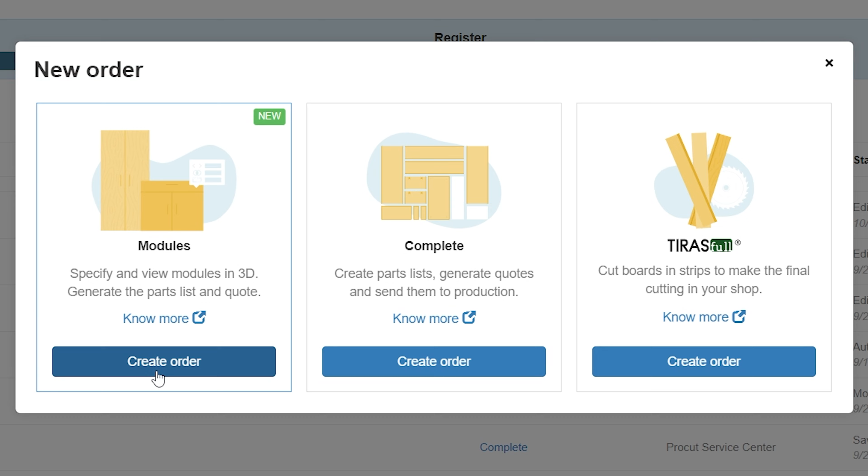First of all, I'm going to access Cortecloud.com, select my country US, and log in to my account. I'm going to create a new order and select modules and my service provider.

I'll name my client, in this case John, and begin by applying some changes to the base cabinets with 2 doors. So I'm going to search for a 2-door base cabinet and add it to the project. I'll specify my room, in this case kitchen, and round up the measurements to 35 inches, 27, and 21 depth.

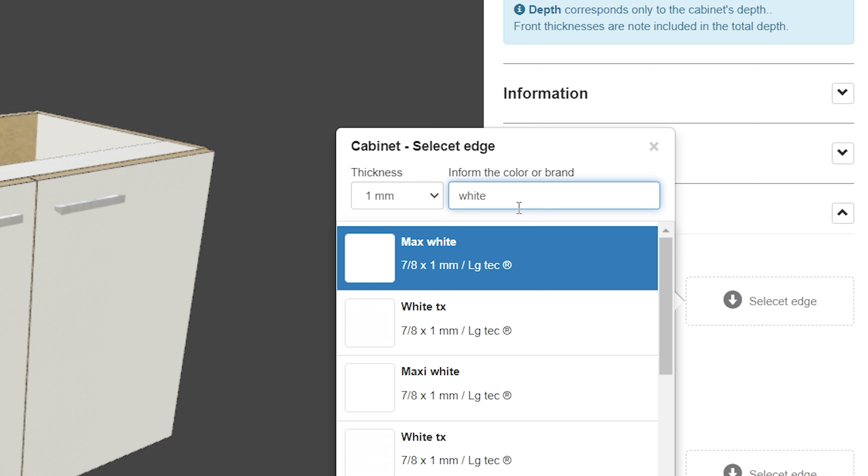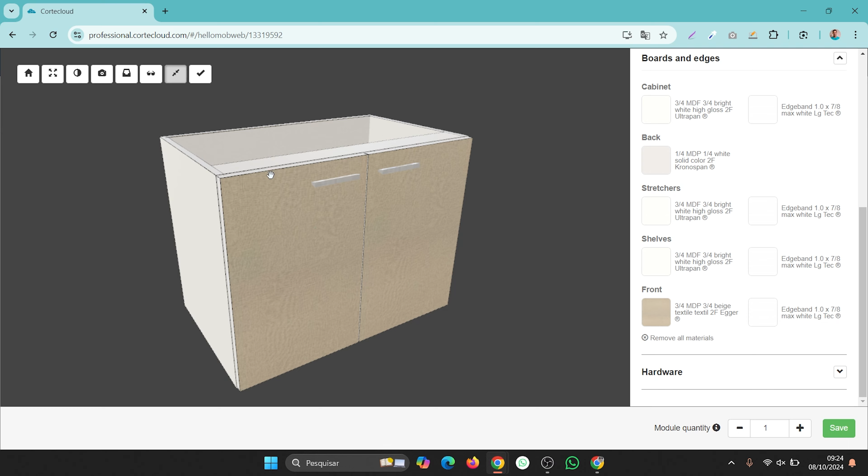Now I'm going to select my materials or boards to apply to the cabinet. I'll use 3/4 white and a 1mm edge band white as well. For the back, I'll apply 1/4 white back, and for the fronts I'll apply a different color, beige, just to make it easier to recognize the changes we applied to the cabinet. I'll leave the edge band white so the changes are easily viewed.

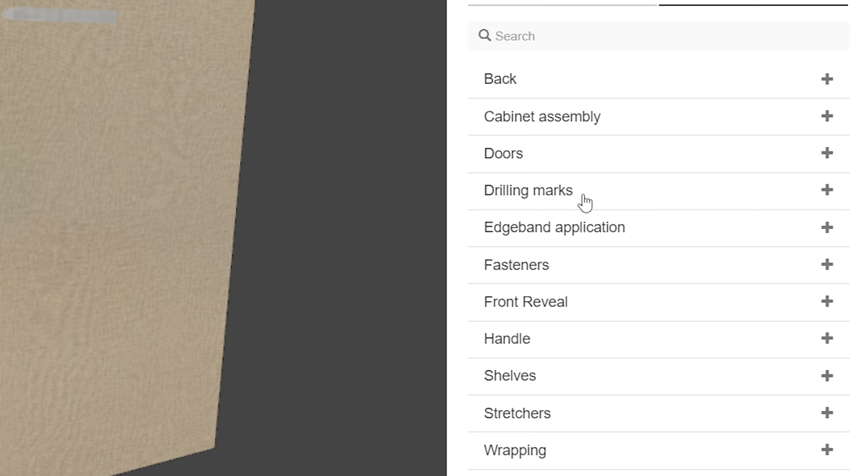Okay, so I'm going to Preferences, Advanced, and we're going to be discussing mostly the front reveal preferences. First, I'm going to apply some changes to the front reveal, and after understanding the simple changes, we're going to combine some changes with the stretchers and handle types.

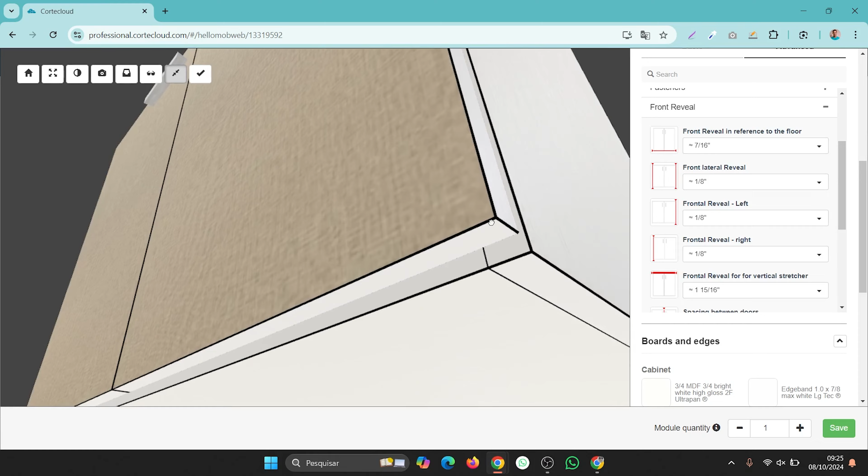First, I'm going to apply the front reveal in reference to the floor, which is this slack or reveal we have here under the doors. I'm going to change from 1/8 to say 7/16. As you can see, you have a different reveal applied to the bottom of the cabinet. I'm going back to 1/8.

Now I'm going down here to the top frontal reveal, which is the same as the bottom reveal, but applied to the top. In this case, 1/2 inch.

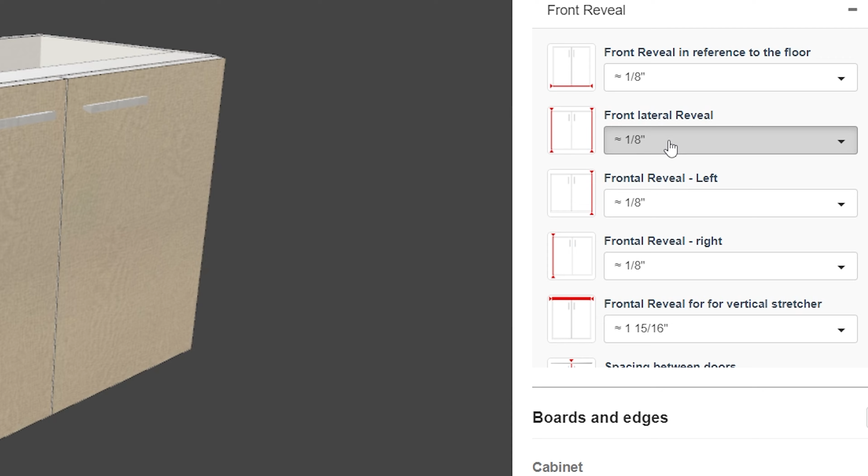Now we're going to apply lateral reveal to the doors, or change the lateral reveal, which is 1/8, and I'm going to apply 5/16. As you can see, at the right and left side, the reveal has changed by modifying this preference. But I can separately change the reveal from the sides if I modify this parameter, tweak for lateral reveal.

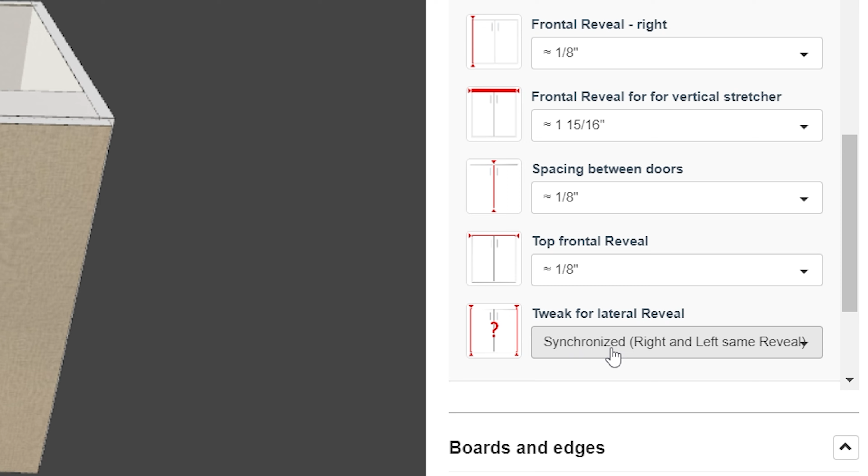I'm using the synchronize mode. If I change to independent, I can separately change the left and right reveals. So for front reveal right, I'm going to apply 5/16, and as you can see, I've just changed the right side of the cabinet, while the left side hasn't changed because I didn't change the front reveal left.

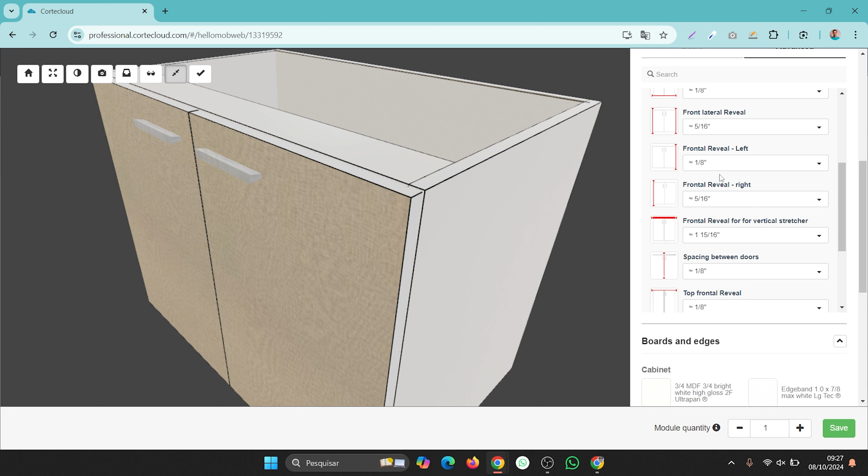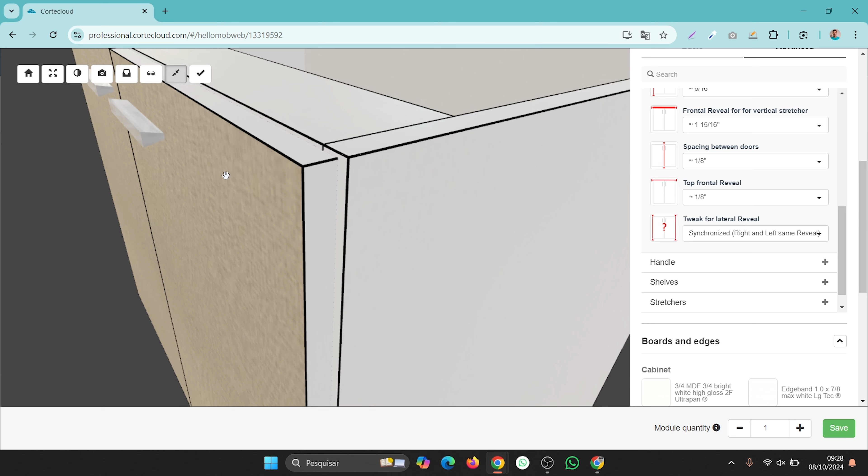If I want to apply a different reveal to the left, I'll apply 1/4 inch, and as you can see, I have 1/4 reveal on the left and 5/16 on the right side. If I go back to the tweak and use the synchronize mode, you can see that both reveals came back to the same measurement as defined on the lateral reveal. I'll go back to 1/8 again and leave the same reveal at both sides.

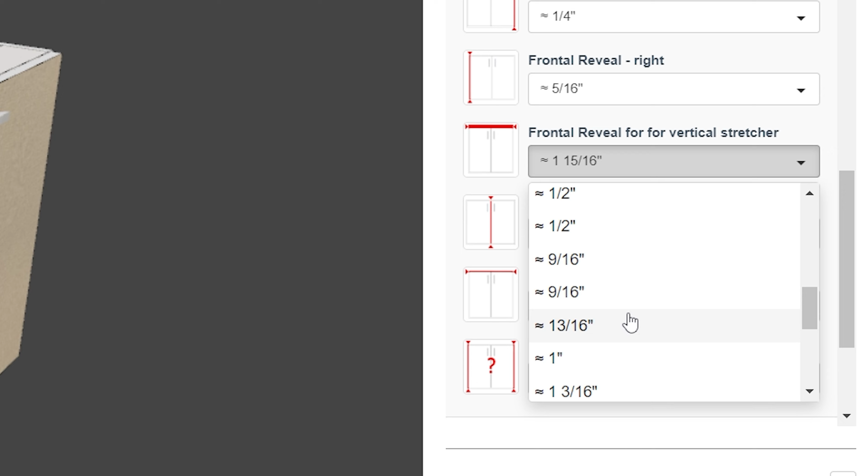Moving on, you can see that we have the frontal reveal for vertical stretcher. Why is this reveal higher than the reveals we've used, and not applied to the frontal stretcher? Because the stretcher is in a horizontal position.

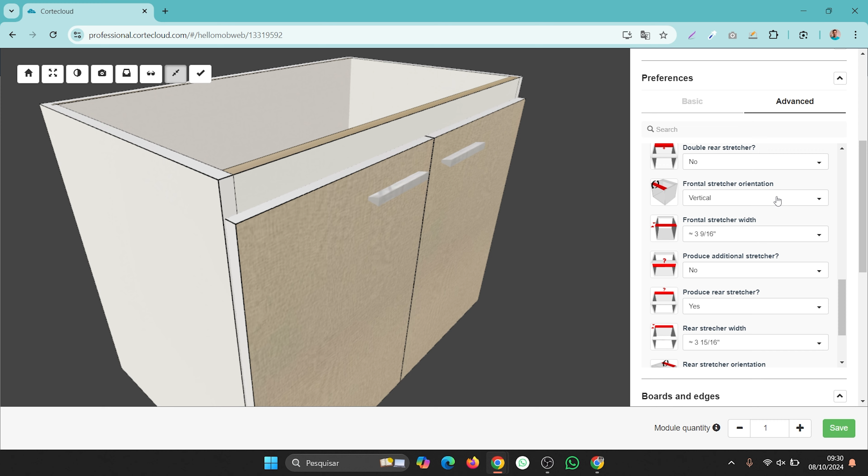If I change the stretcher to the vertical orientation, this reveal is going to apply. So let's go to stretchers and change the frontal stretcher orientation and apply a vertical stretcher. As you can see, the front reveal has already changed according to that configuration. So let's change it to 2 3/4. As you can see, as I change the front reveal, it applies when the stretcher is vertical.

If I go back to stretchers and set the frontal stretcher to a horizontal position again, we're going to have the top frontal reveal applied to it.

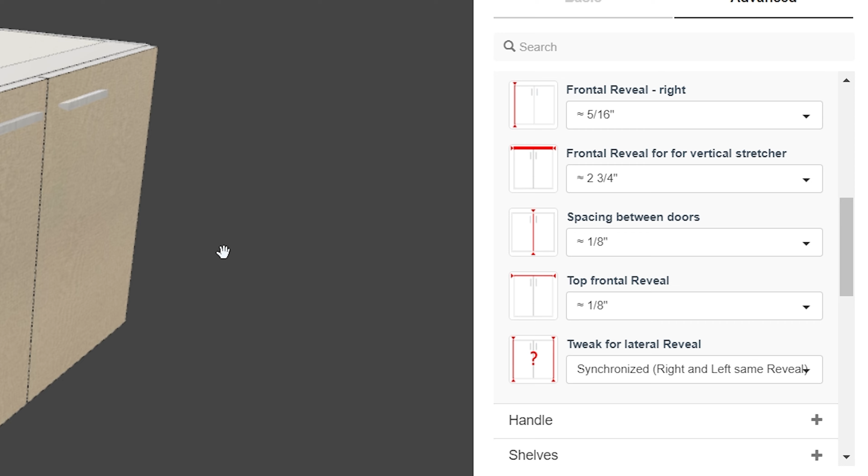One last thing about this door configuration or door reveal is the spacing between doors. I can change the spacing and it's going to apply to the slack we have between doors in this cabinet. Okay, so I'm going back to 1/8 and I'm going to hit save and move on to the next module.

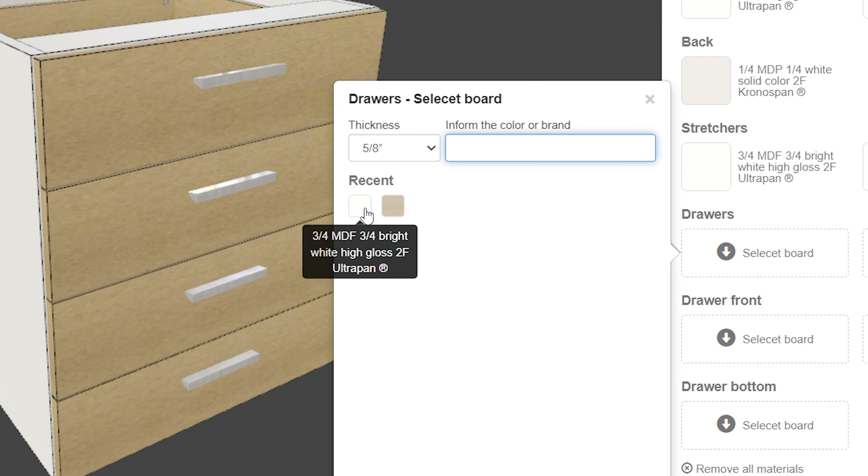Our next example is a drawer cabinet, base drawer cabinet. Let's grab this one. I'm going to set materials white, edge band, 1/4 white back, and for the fronts let's apply the beige again. And I'm going to preferences and set just 3 drawers to this cabinet. Okay.

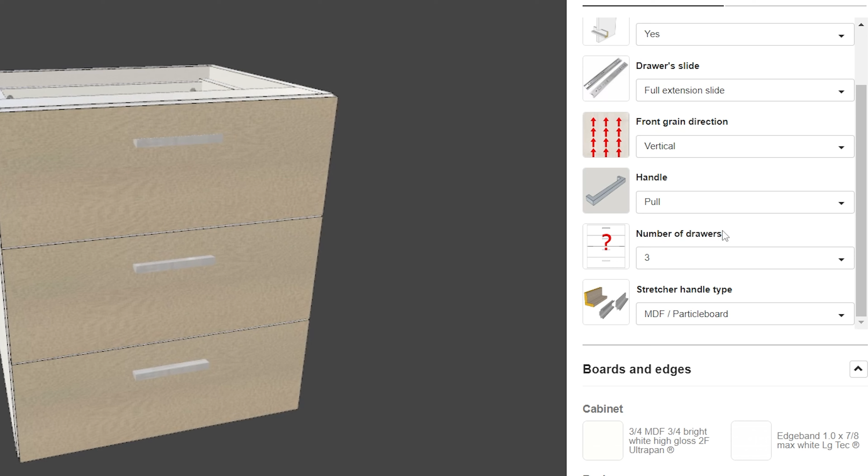Let's go to advanced front reveal. As you can see, we've got the same configurations as the base cabinet. What has changed is some of the possibilities, which is the drawer front reveal. We can change the spacing between drawers. If I change this configuration to 1/4 inch, I'm going to get a bigger spacing between drawers.

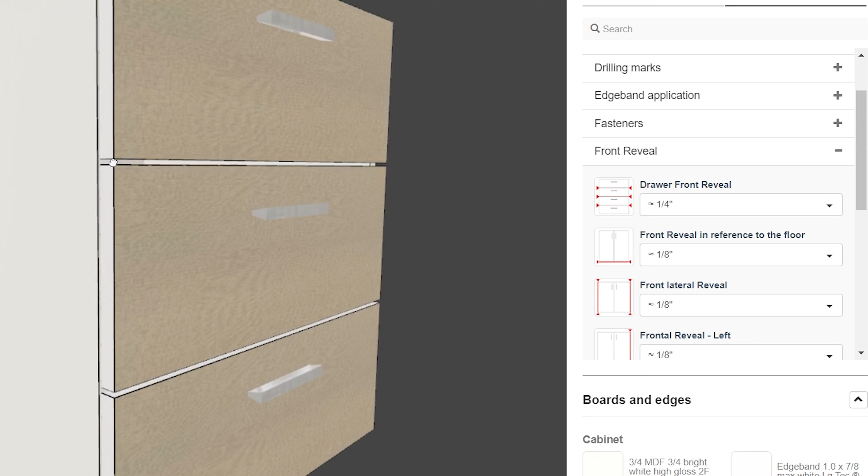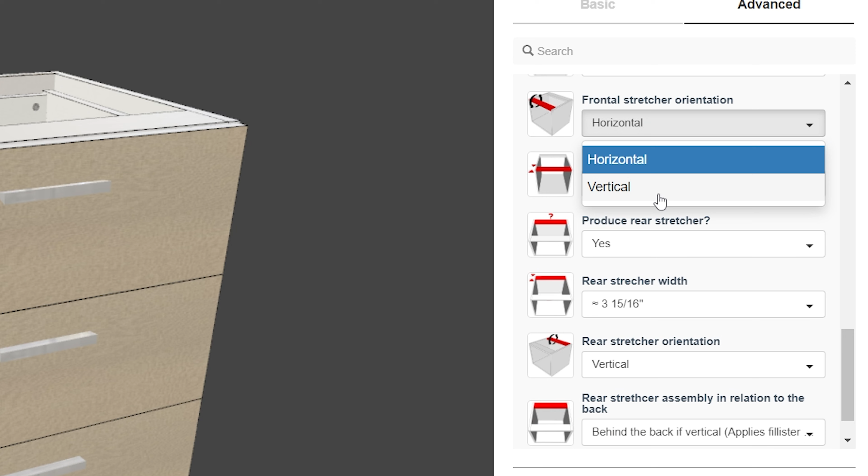The bottom, lateral, left and right stretcher, all the same configurations we've seen in the first module apply to this cabinet as well. Going back to 1/16 front reveal, if I go to stretchers and set the frontal stretcher to a vertical position, you can see that the same reveal we've applied to the doors applies to the drawers as well. So I'm going back to horizontal stretcher on the front.

I'll hit save, and let's grab another base cabinet. This one, equal drawers and double door.

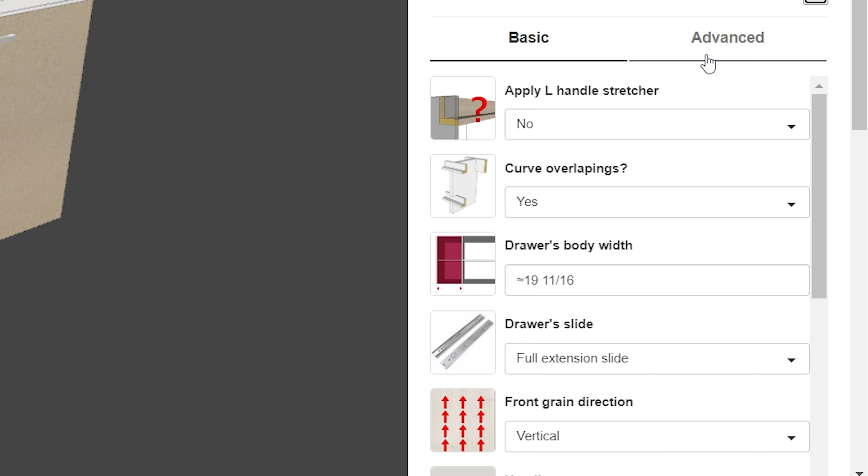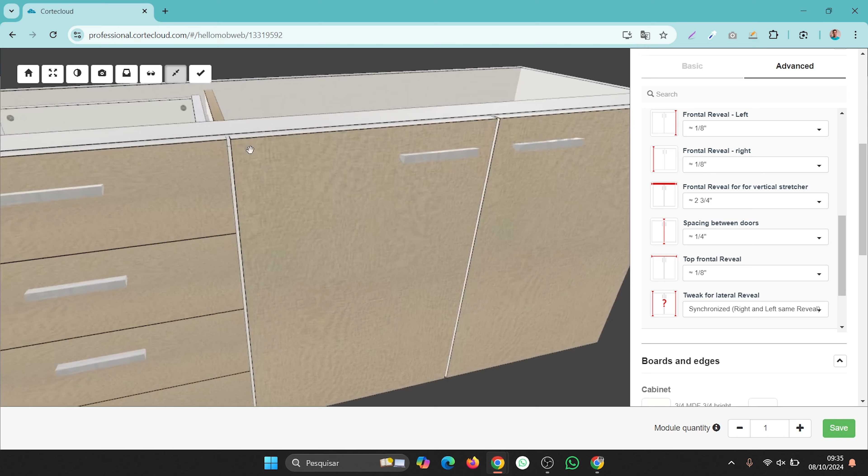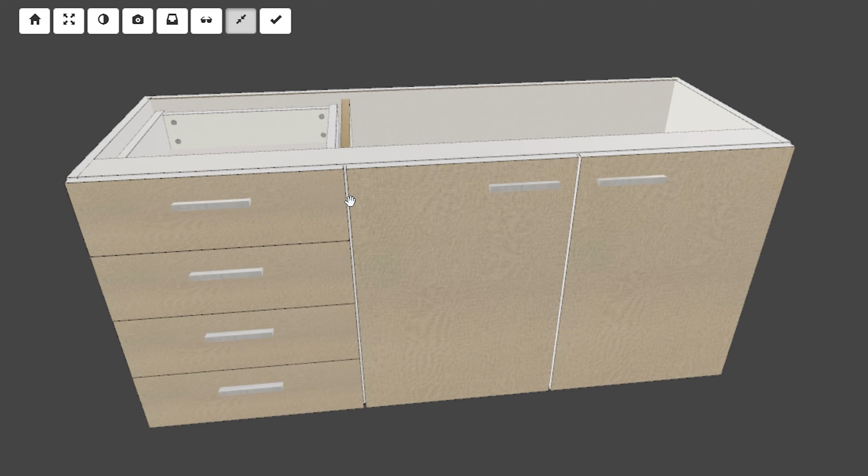Let's go to preferences, and we're going to notice something very important if you are working with cabinets that share a divider. In this case, the divider shares drawers on the left side and doors on the right side. So if you go to advanced front reveal, we can see that door spacing between doors applies to this case and to this case as well. Applying this configuration to drawers and doors on the same cabinet has an aesthetical reason, because if you don't apply the same reveal to both fronts, we're going to get different slacks or different reveals for the same cabinet, which is aesthetically undesirable. So that's the reason why we apply the same spacing between doors and drawers in this case.

Save this one. I'm gonna grab drawers again, get this horizontal drawer cabinet.

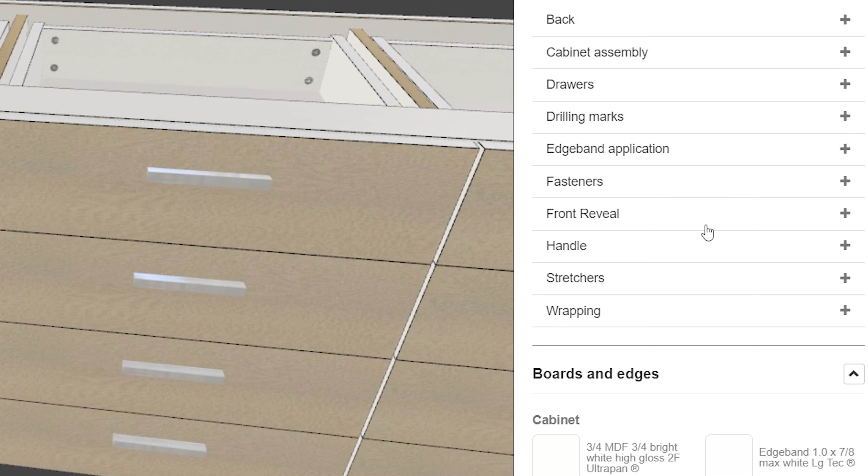As you can see in preferences, advanced front reveal, the spacing between doors applies to these drawers and this as well. So the spacing between doors affects doors and drawers when used in the same cabinet. As you can see here, the drawers share the same spacing if we change the configuration.

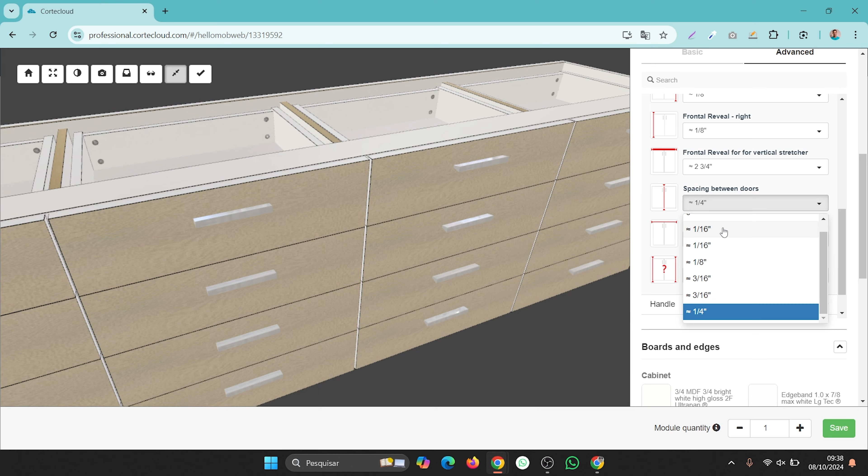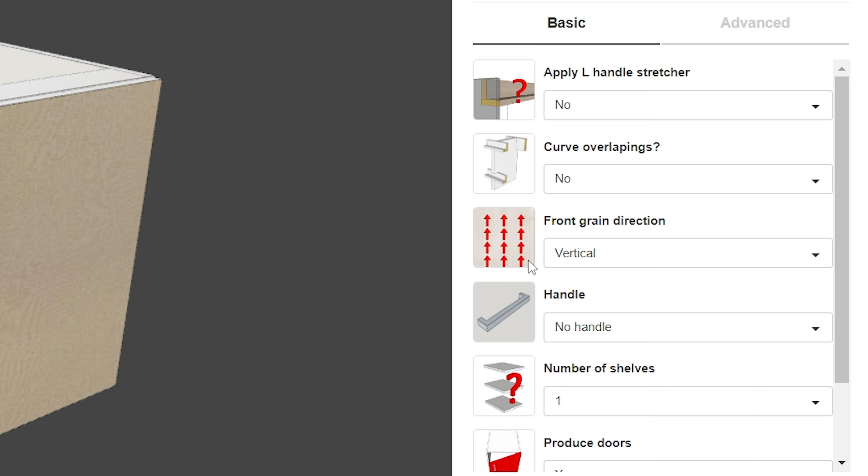Now let's have a look at a particular case when we apply the Gola handle to the cabinets. Let's go back to the 2-door base cabinet and go to preferences. On basic, we're going to apply stretcher handle type, which is aluminum. I'm going to use the Gola handle for this. And on apply L handle stretcher, let's move to yes. As you can see, we've got a bigger front reveal on the top because of the Gola handle we have just applied to this cabinet.

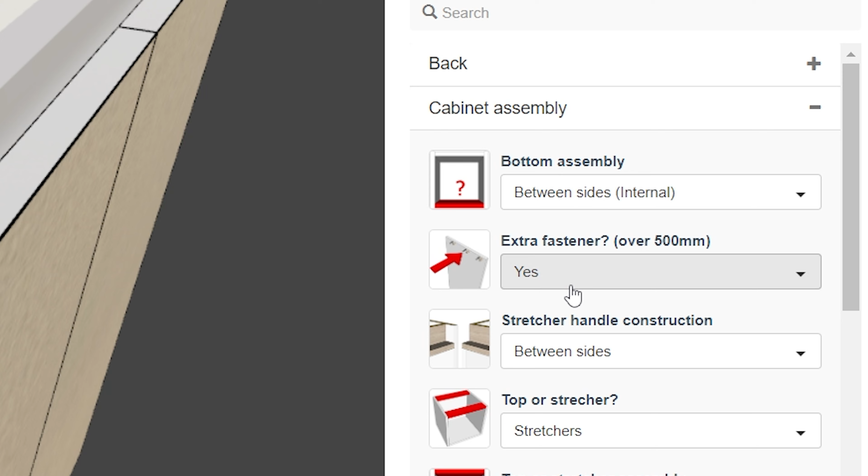Okay, so let's make some changes. Let's go to advanced cabinet assembly and select stretcher handle construction between sides. No, we're gonna put opening on sides. By changing this configuration, we're going to dig a recess on the sides for the handle to pass through the sides and connect to the next one.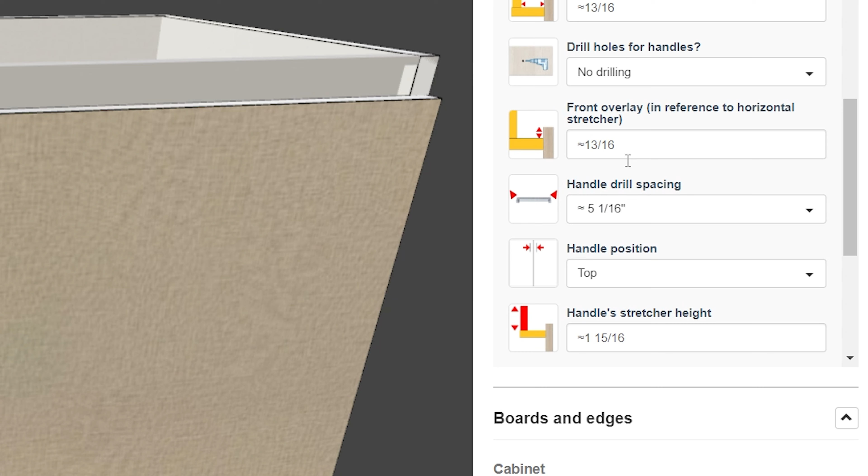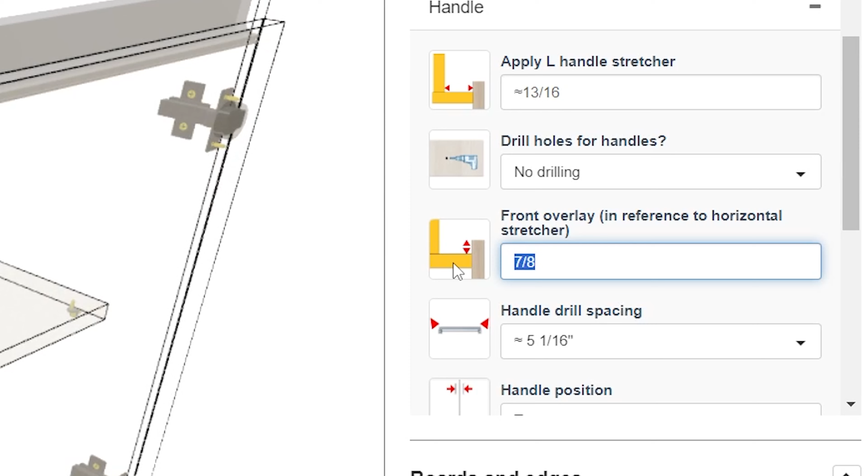So if you use this kind of handle, we go to handle and we can make some changes on the configurations in this part, which is going to affect the front reveal as well. If we change this configuration, front overlay, let's say 7/8, you can see that the door is going to protrude a little bit more, passing the handle, giving more space for the user to grab the door. If you go to 3/4, you're going to reduce the spacing.

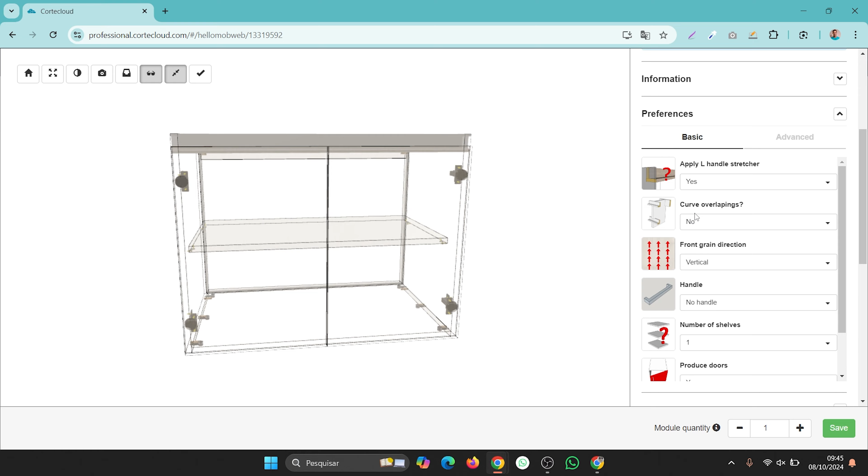You can also notice that if we apply the Gola handle as we did, the frontal stretcher is going to be gone because we don't need it anymore. Just the rear stretcher is going to be produced in this case. And one last thing about using Gola handles: if we use curve overlappings. I'm going to save this module. Let's grab another one with 4 doors.

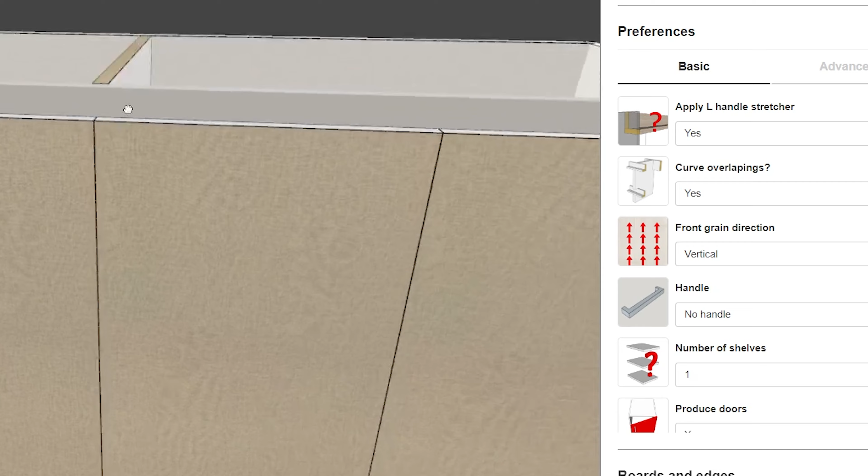This base cabinet has a divider which is going to affect the Gola handle. If we go to preferences and set curve overlappings to yes, the Gola handle is going to cut a recess, dig a recess on the divider as well as on the sides.

One last thing, if you want to apply particle board handles, you just change the handle type to MDF or particle board, and you're going to get this result, which applies like tiny strips. That's going to give you the same result as the Gola handle on this cabinet or in other cabinets.

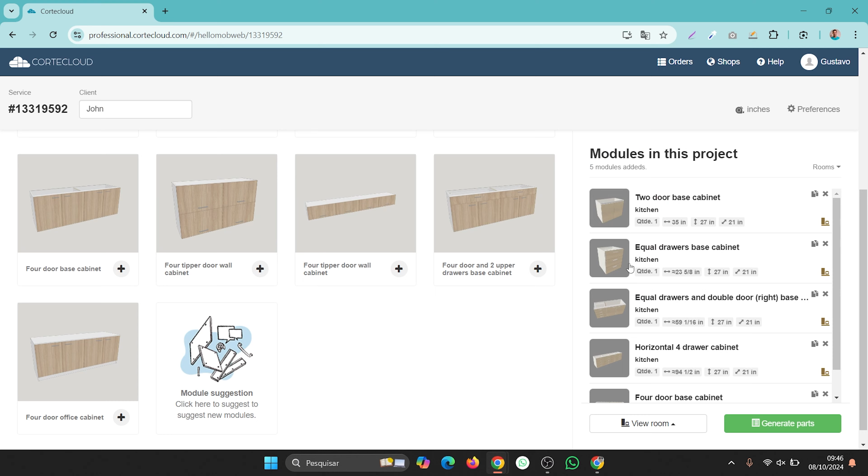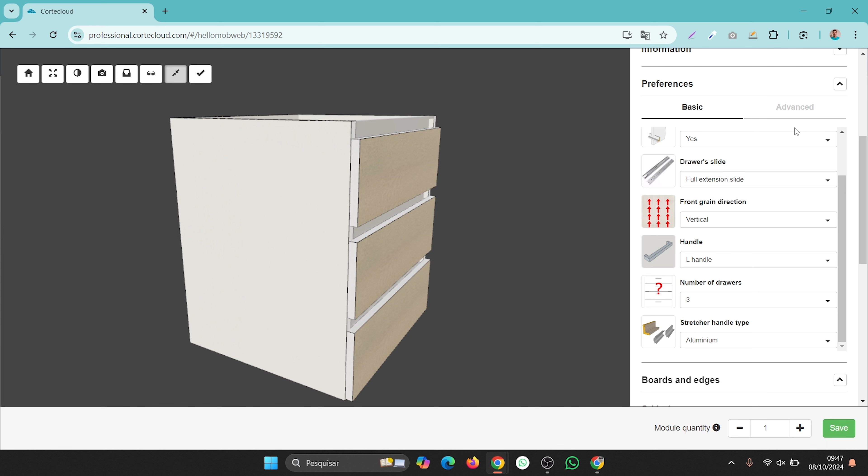If you go to drawers, you basically have the same configuration. On preferences, if you apply L handle, it's going to affect the superior part. And if we set the intermediate handles to L handle, this is the result we're going to get. If we change the stretcher handle type to aluminum, you're going to get the Gola, and in advanced cabinet assembly, stretcher handle construction, opening on sides, you're going to get the recesses as well. So if you apply the same configurations to the drawer set, this is the result you're going to get.

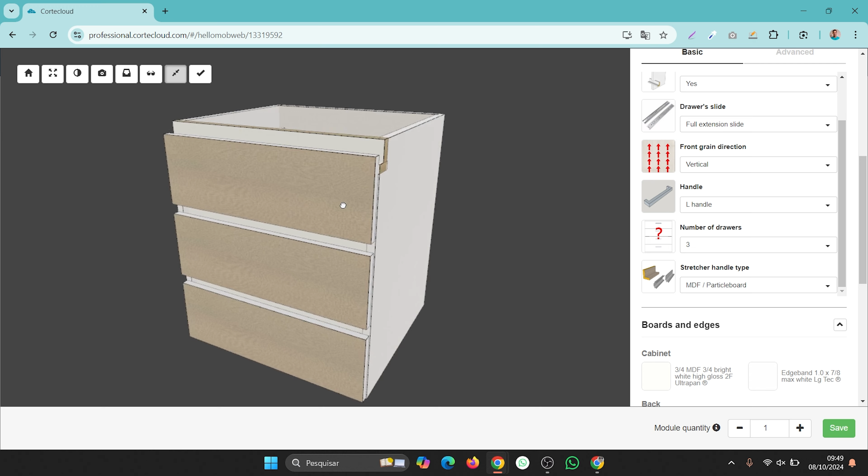And if you go to basic and set the handle type to MDF particle board, basically you can do the same changes as we've discussed before. So that's basically a quick review on the front reveals that you can set on Cortecloud's library. If you've got any questions or comments, just let us know on the comments down below, and I hope to see you soon in another tutorial.